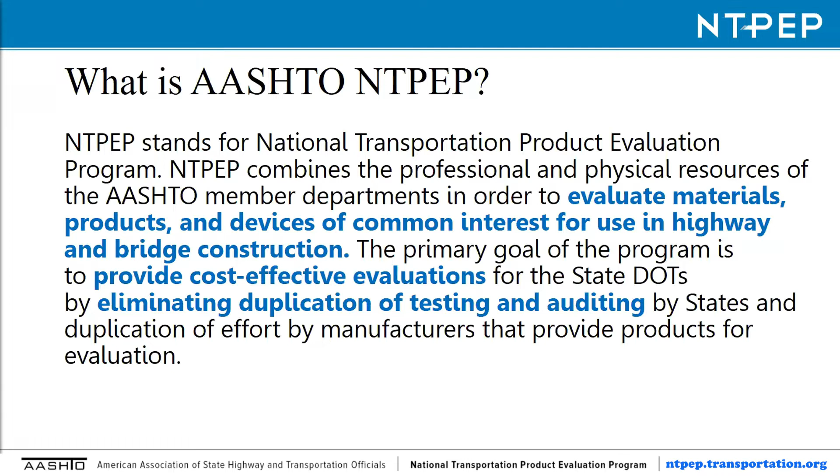For those who may not be familiar with AASHTO's third largest technical service program, NTPEP stands for the National Transportation Product Evaluation Program. The purpose of this program is to combine both the professional and physical resources of each of the state departments of transportation to evaluate materials, products, and devices used on both roadway and bridge construction. The primary goal of this program is to provide cost-effective evaluations for the DOTs by eliminating duplication of testing and auditing services by the states, and it also removes the duplication for manufacturers to provide these products and data to the state DOTs.

Some of the benefits of this program: NTPEP pools resources to save the states and manufacturers both money and time. The data from the product evaluations and audits are available on our NTPEP DataMine website. The NTPEP members contribute to the work plans that are utilized to carry out these product evaluations and audit programs. The NTPEP technical committees provide a platform for both states and manufacturers to share their expertise and voice any concerns they may have. By this unique partnership, we are able to sustain a high level of quality for these products being evaluated within this program.

What is the NTPEP DataMine website? It's commonly referred to as NTPEP DataMine 3.0. It is the online repository of all the data and all the audit documentation that gets put out as a result of the evaluations and audits taking place. This database provides the tools for you to perform queries that will assist you in analyzing and reporting on current and past NTPEP evaluations. It also allows the test facilities and auditors to enter real-time data. So as the testing gets completed, as the audits get completed, this information is available to all of those registered users in DataMine. If you do not have a DataMine account, I highly encourage you to check out the NTPEP DataMine website.

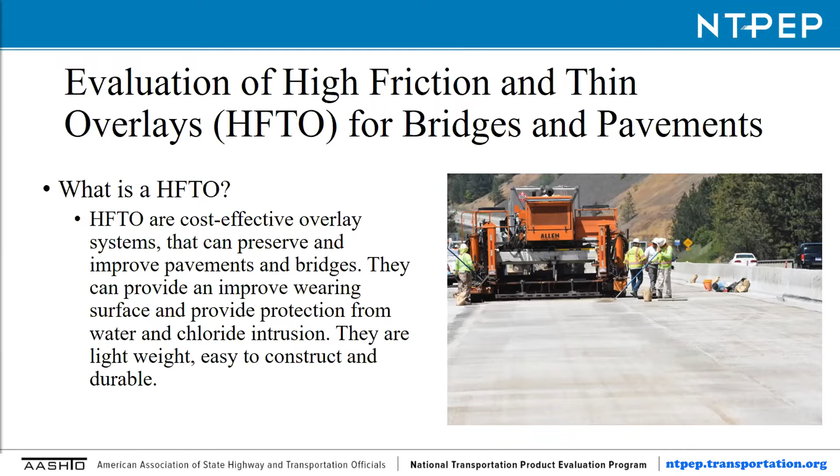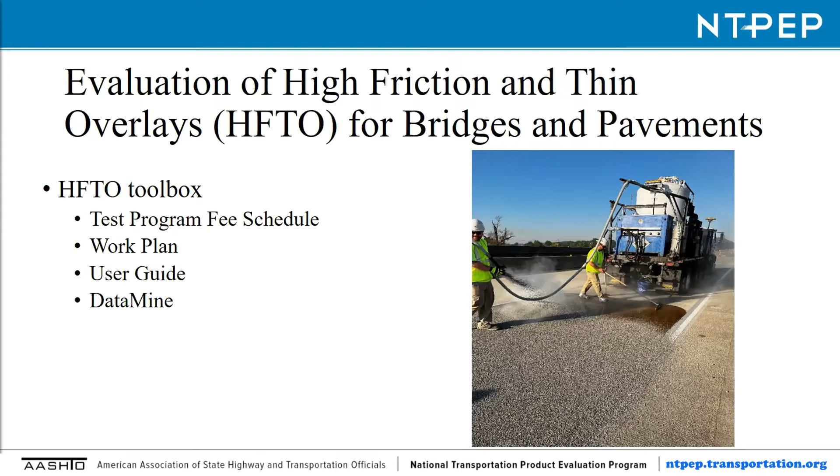The high friction thin overlay technical program contains 4 basic components. The first is the application and testing fee schedule that manufacturers consult and apply in order to participate in the program. Next is the work plan that provides the structure of the program and outlines exactly what the testing and evaluation program entails. Next is the user guide, which serves as an implementation tool for agencies to utilize to determine how they can best use the program. Finally, Data Mine is the repository for all the data and the reports generated by the High Friction Thin Overlay program.

The fee schedule for all of the technical and audit programs are found on the NTPEP website. The general description gives an overview of what will be included and the product evaluation or audit fee. This program is comprehensive in that it provides for both lab testing of the individual components of the overlay system, as well as the field evaluation of the constructed overlays onto multiple substrates, including asphalt, concrete, and a concrete bridge deck.

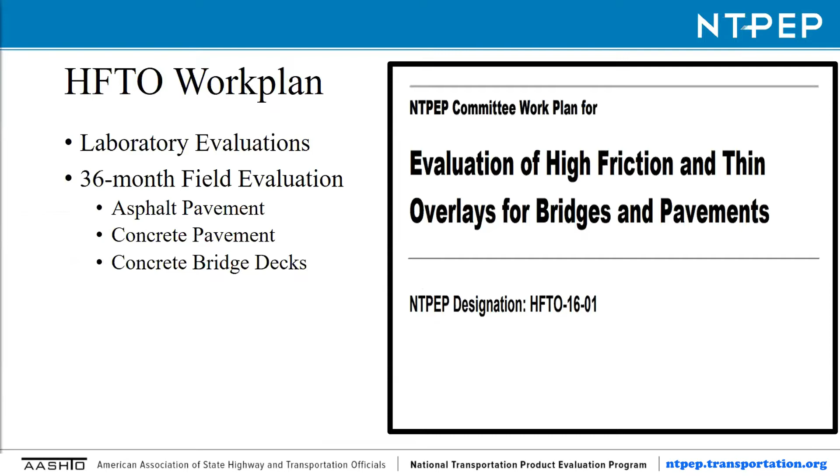The work plan is a summary of the specifications, processes, sampling, and inspection procedures that will be followed during the evaluation of the high friction thin overlays. This work plan will be followed for each material submitted to the technical committee. The work plan standardizes the evaluation and allows for consistency, reproducibility, and transparency. When states utilize the NTPEP programs, it streamlines and improves the overall quality of the high friction thin overlays constructed in all of our states.

The laboratory evaluations are included, as well as the 36-month field evaluation. Sampling is also outlined in the work plan.

The integrity of these samples is critical to the program's success. Representative samples of the polymeric binder resins, both Part A and Part B, are sampled separately from the material that arrives at the field test site locations. A representative sample of the aggregate is also collected.

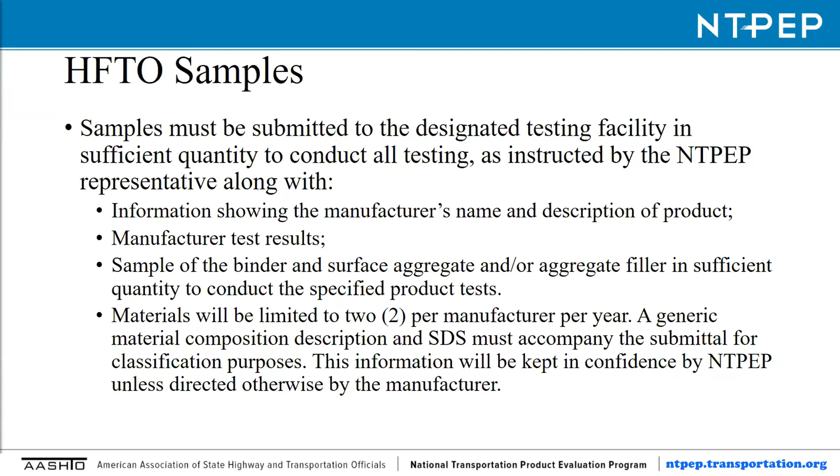These samples are labeled and secured by NTPEP staff and delivered to the High Friction Thin Overlay Test Program contracted laboratory for the testing. Samples must be submitted to the designated facility in sufficient quantity to conduct all of the testing, as instructed by the NTPEP representative, along with information showing the manufacturer's name and description of the product, the manufacturer test results, a sample of the binder and surface aggregate and/or aggregate filler in sufficient quantity to conduct the specified product test, and the materials will be limited to 2 per manufacturer per year.

A generic material composition description and SDS must accompany the submittal for classification purposes. There are several different binder systems used in this program, and we want to be clear on which system we are testing. This information will be kept in confidence by NTPEP unless directed otherwise by the manufacturer.

Future Labs, LLC is the High Friction Thin Overlay contracted laboratory. They have done an excellent job with this program, and were generous enough to provide the photos that I will use to describe the lab testing aspects to follow in these slides.

They perform both the polymeric resin binder testing as well as the aggregate testing. The binders are tested as individual components as well as mixed. The properties tested on the binders include viscosity, gel time, tensile strength, tensile elongation, tensile modulus, absorption, Shore D hardness, compressive strength, and an infrared spectrum is collected. The properties of the aggregate tested are gradation, absorption, Micro-Deval, and the XRF spectrum is also collected on the aggregates.

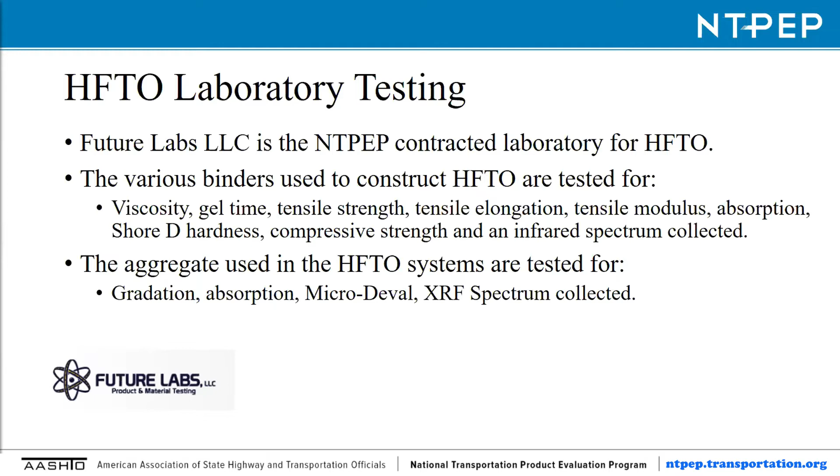The testing performed is done in accordance with standard methods of both ASTM and/or AASHTO. Details regarding the mixing and curing are provided by the manufacturer. I'm now going to dive into the details of each method in the next few slides.

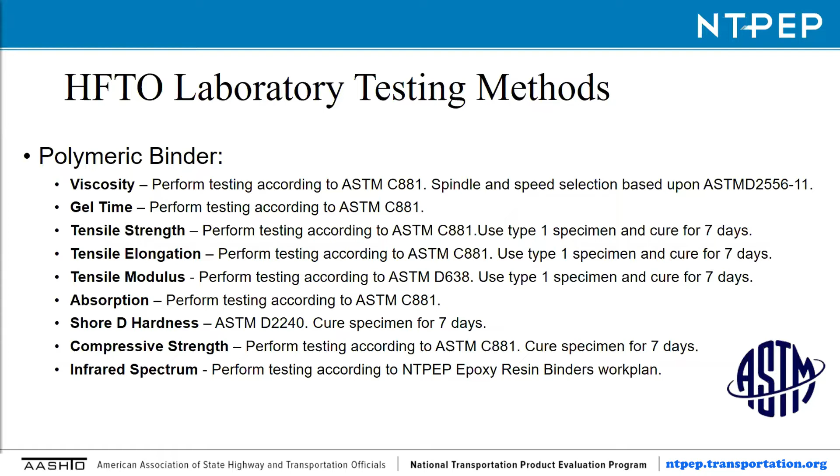After the components of the binder are mixed in accordance with the manufacturer's recommendation, viscosity is performed in accordance with ASTM C881. The spindle and speed selection are based on ASTM D2556, the year number 11, because of the spindle selection chart in the appendices.

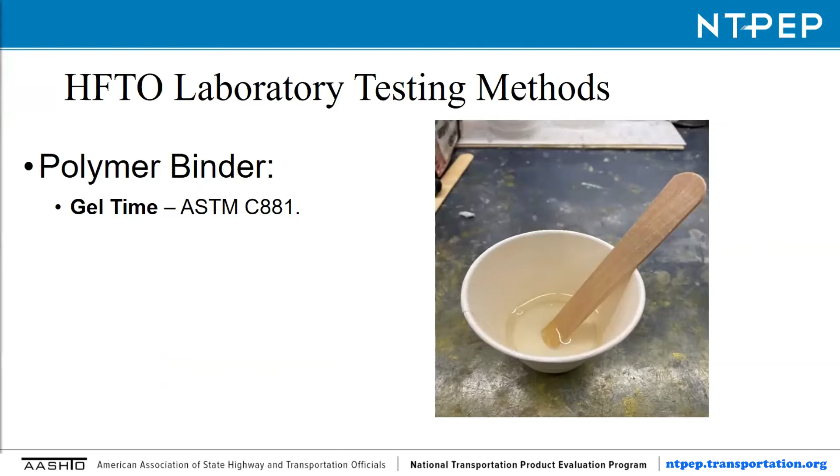The gel time is evaluated on mixed binder material in accordance with ASTM C881. The components are mixed together and placed in a cup, and the gel time is then tested. Tensile and elongation properties of the mixed and cured polymeric binders are tested in accordance with ASTM C881.

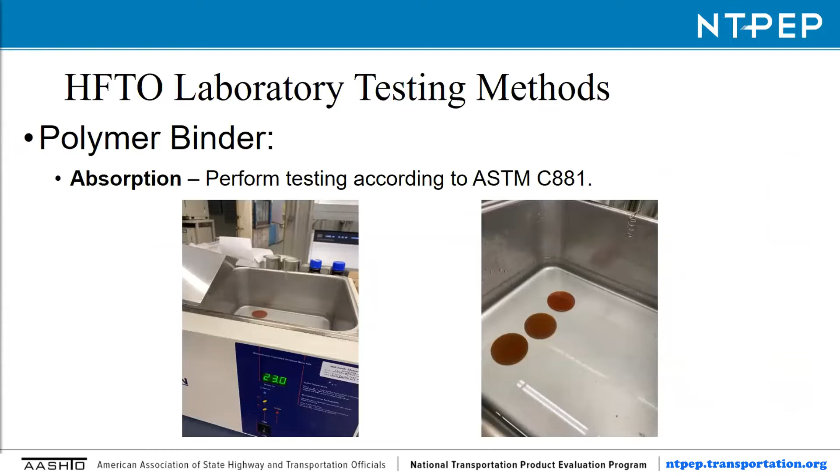Absorption will be evaluated on the mixed and cured binders in accordance with ASTM C881. These photographs depict the testing as done in the Future Labs laboratories.

The Shore D hardness testing will be done in accordance with ASTM D2240. These are a couple pictures showing the testing in progress.

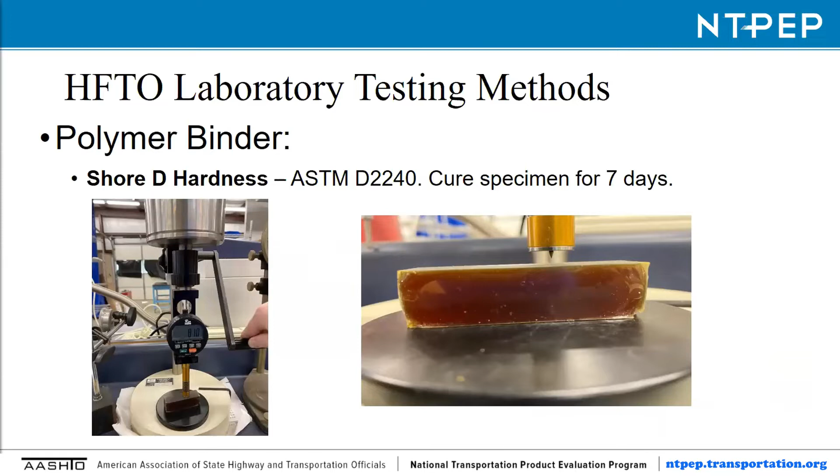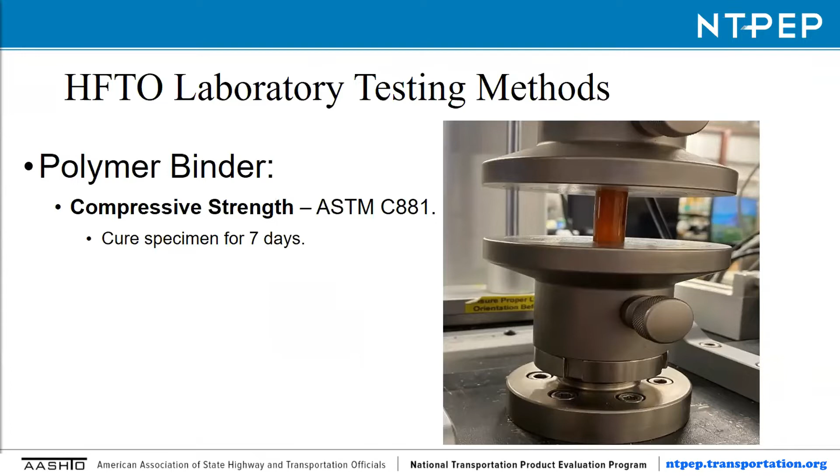An infrared spectrum is collected on all the binders. The spectrum is collected in a standardized manner that allows agencies the opportunity to use those spectra in both a physical paper format or electronic format to evaluate the materials supplied to their state with those submitted to NTPEP. This is a way states can perform quality assurance testing and utilize the high friction thin overlay program to verify that data.

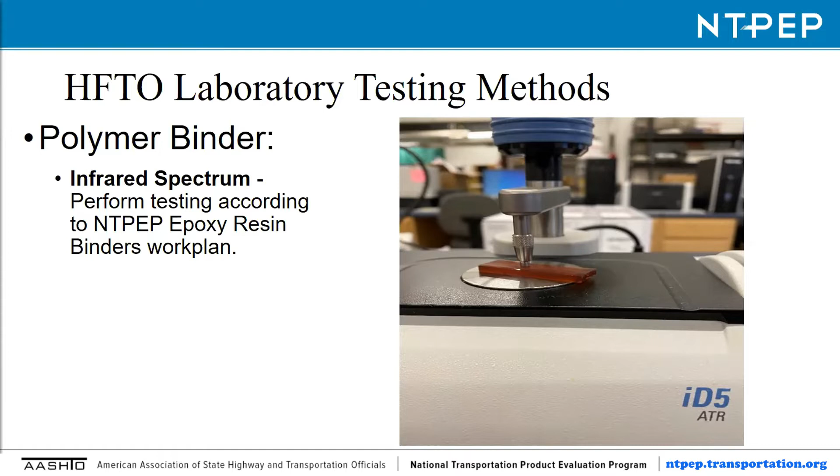The aggregate portion of the high friction thin overlay systems are evaluated by the contracted laboratory as well. Future Labs also does the aggregate testing. Aggregate is tested for gradation, absorption, Micro-Deval, and X-ray spectrum.

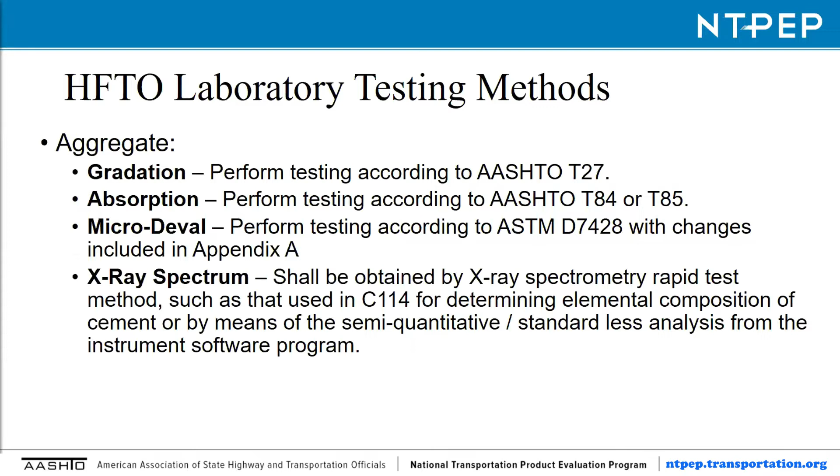As mentioned previously, representative samples are collected from the field evaluation test site. Those samples are processed by the lab for each of the tests performed. Most states have their own criteria for the aggregate, and the high friction thin overlay aggregate evaluation data may be used to verify compliance with your own state specifications.

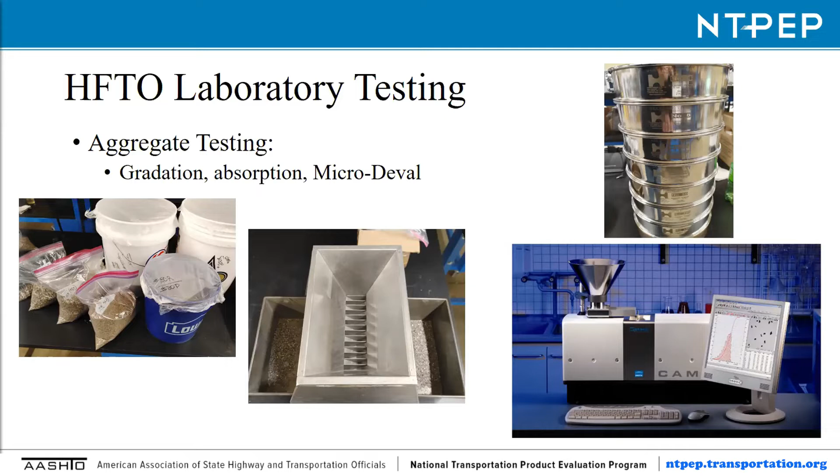Micro-Deval testing is performed in accordance with ASTM D7428 with modifications. Those modifications can be found in Appendix A.

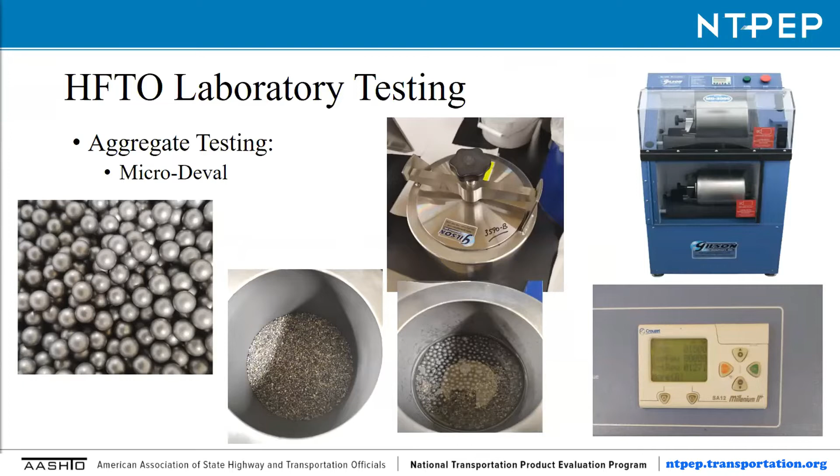X-ray fluorescence, XRF, is analyzed to determine the elemental analysis of the aggregate. Again, this data may be compared to state specifications for compliance with chemical requirements within your specifications.

It is now my pleasure to hand off the presentation to Danny Lane with Tennessee DOT. He is the esteemed chair of the High Friction Thin Overlay Committee, and he's going to discuss the field evaluations, data mined, and the new reports being prepared for the high friction thin overlay products evaluated. Danny?

Thank you, Kelly. Can everyone see that? Am I showing what it's supposed to be showing? Absolutely, yes sir. Okay, great. Well, thanks, and we have a nice crowd here today, 70-something people. It looks really good. But let me get started.

Kelly went over what we do in the laboratory and what Future Labs has done for us. Later on, she'll share some other things they've done a really good job, and we're glad to have them aboard. Well, my name is Danny Lane.

As you well know, I work for Tennessee DOT. I did a lot of these demos and stuff like this long before we had the HFTO field evaluations. I got to be part of that in 2012, 13, and 14 in Kentucky, 2016 and 17 in Tennessee, and now in Missouri.

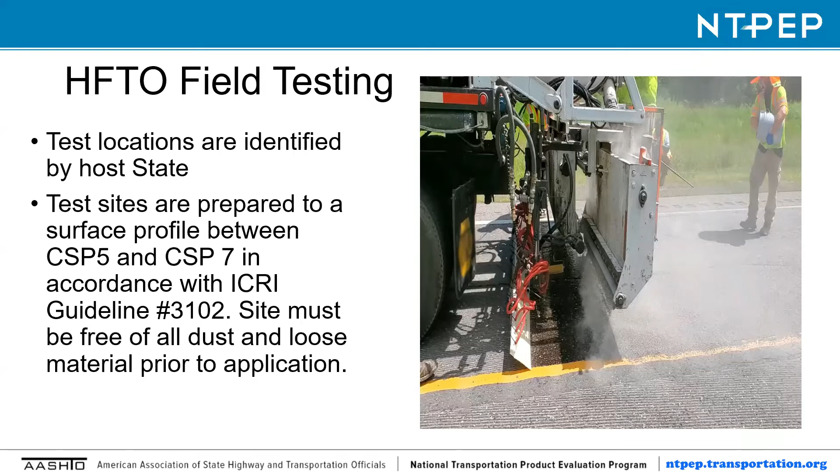The Missouri DOT and NTPEP got a company out there to shot blast these areas to have them ready to go when we do apply to the concrete. The asphalt, of course, is all just air washed like we do every day in a regular contract.

Our host was Missouri DOT, and Todd Bennett and his folks there stepped up this year, and they picked a heck of a place.

Myself and Richard Weber from our department went out and visited and looked at these site locations, and we really got excited. I think it's going to be a really good test for these products.

The 2 days of installation were September 28th and 29th. As you know, some of these test decks we did in June and July, and buddy, it is hot. It was still hot even in September, but starting temperatures were in the 60s and ending in the 90s, so our deck temperatures did get over 100 in some areas.

Each site has an NTPEP representative. Originally in Kentucky, I came up with some field notes, but I was stuck on the bridge for 3 days that weekend, so everybody that came to the bridge, I had to look at their products and go take notes myself. We changed that in Tennessee - we put an engineer or technician with each supplier, and they followed that supplier around to every deck so they could take notes and record start and finish times, cure times, and things like that. We document all that, and I'll show you that later too.

Manufacturers participating were Cornerstone, Epoplex, and Mineral Research. Now, Mineral Research is an aggregate that they use. They did use a binder from EChem to put this in, so that's going to be recorded too.

SharpGuard is an aggregate that we're looking to prove. As you know, if you've looked at other test decks in Tennessee, we had 5 different aggregates, and I'll let you know that 2 of those came out ahead, and TDOT is using them now. So we're excited about that. We like the fact that not only binder systems, but aggregates get to participate in this too.

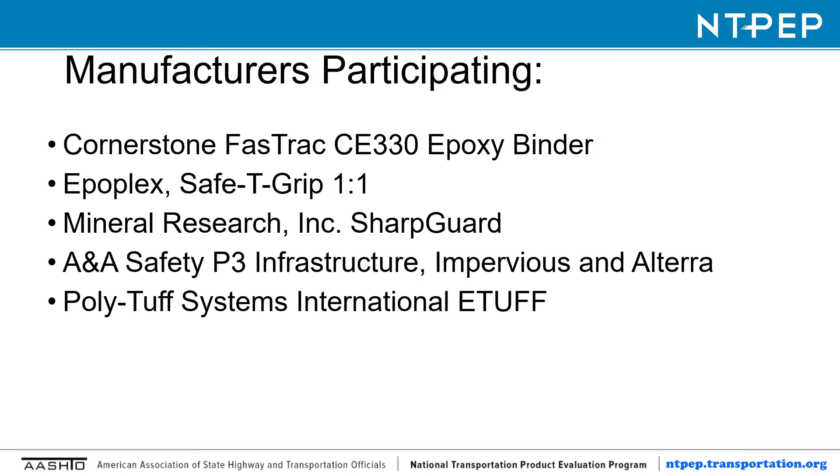A&A Safety was the contractor for P3 Infrastructure, which had 2 products, Impervious ME and Alterra, and then Poly-Tuff Systems International ETUFF. So we had good manufacturers participating in this program - not quite as many as we had in Tennessee, but still a large crowd.

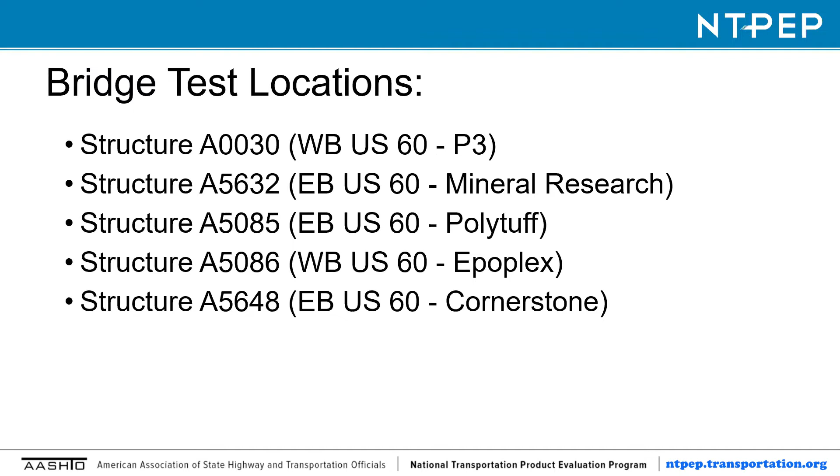We used bridge deck test locations, and it's really funny - Kelly came up with this guide, these test deck locations on a Google map. You can actually, from our report, go to the GPS, and you know Missouri is a flyover state, so they get Google Earth brand new every year. We'll have pictures every year and everything, but you still use the GPS to go look at these, which I have done several years after, even in Kentucky. So remember that - we'll have all those locations listed.

Representatives on site were Catherine, of course, Todd Bennett, and Seth Bollinger from Missouri. They did a heck of a job. Seth pretty much did the deck prep and all the traffic control, and did a great job for us, because we do have people out here on this test deck and they need to be protected.

Leonard Vader was a technician, a chemist with Todd - he was one of the representatives. Madeline Whalen, myself, Richard Weber, and Kelly Morse each had a supplier that we stuck with both days, and so we followed them. We knew every move they made, and we could document everything that goes on.

Also some more friends, Justin Morris and Khalid from Louisiana, showed up and gave us a hand. They got to see some firsthand experience of how this test deck goes down and what happens in that 200-foot section that needs to be done, and done perfectly.

You'll be surprised when you look at these reports that they're all done a little differently. Not everybody does it with a mechanical mixer. Some are the same, some are not, but you'll get to see what goes on, and they all come out pretty good.

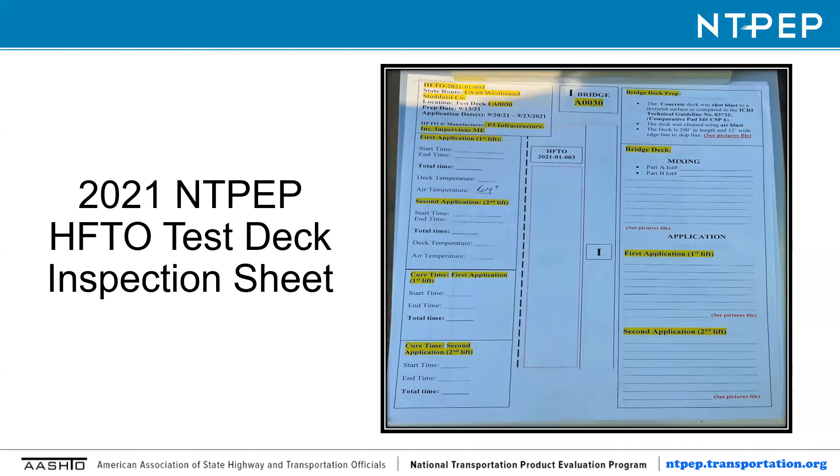We come up with this to get everything in order. So when that person is following that supplier around, they get to take notes on everything they do for that particular test deck. We photograph the worksheet to designate location, so every photograph that comes after that is for that test deck. This helps our inspectors and reps keep up with everything they've got, and we put it in later when we compile a file.

We verify the structure number and location. We document the time and start of the first and second application — of course, the second application is only for bridges. We do try to record the deck temperatures and air temperatures for both, to give you an idea of when and how this stuff was put in.

We try to track the cure times. We know these products, these binders, cure within an hour or two after placement. Sometimes the contractor would leave, go to another test deck, come back and later sweep off — that doesn't mean it took that long to cure. Most of these have traffic turned on them within two hours, sometimes sooner. I don't recommend it, but some of them are faster than that.

We document the material mixing details — part A, part B, lot numbers, and all that — for our future lab people, so we have all of our samples and know where they came from. The photographs taken demonstrate the process and steps taken to install the HFTO.

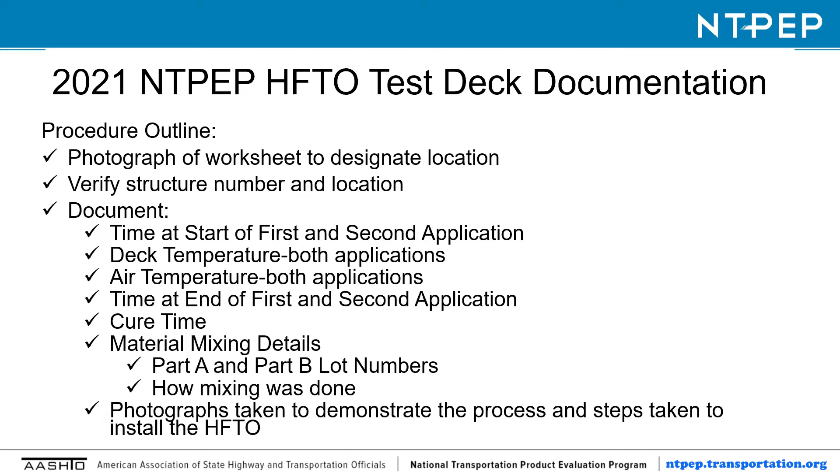Then in the report, we show the final twenty pictures for the initial application and every year after that.

In the 2021 HFTO test deck photographs, the concrete deck was shot blasted, and everything was air blasted. Some of the suppliers did this on their own too, just to get loose impediments or anything off the deck that they felt needed removing.

The deck was 200 feet long, 12 feet wide, edge line to skip line. As you'll notice, some of them use duct tape or something similar to protect the line — we do this practice even in Tennessee. But when we're doing a bridge deck, we go wall to wall because we want to protect the complete deck of that bridge, and again, we use it extensively in the state of Tennessee.

The trucks and materials mostly come with assisted mechanical mixers — in other words, they have a part A, part B tank along with the aggregate. They come through a static mixer and it mixes right there. We found out, even in the materials testing laboratory, that this is the best way to mix the A and B, even in the lab. We learned a lot of good things working with the future labs and those guys this year, and they really liked the idea. That's exactly how it's done in the field.

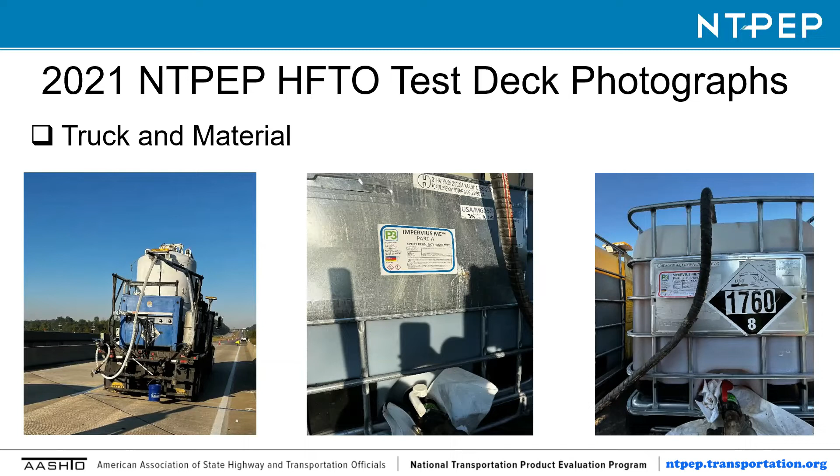We're going to show you all the applications for these and how they're done in a picture sequence for each test deck, so you'll see how the process works. If you notice these three pictures here, the mechanical mixer is dropping the binder, the guy is squeegeeing it, and the guy with the aggregate is coming in behind it, placing the aggregate on top of the binder.

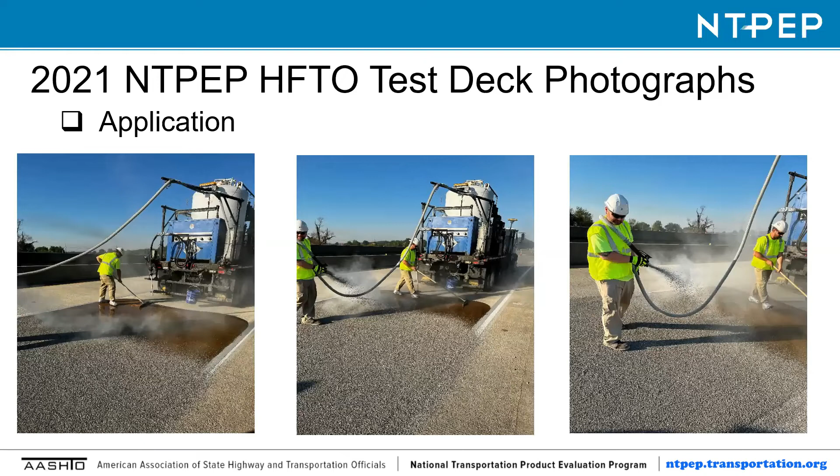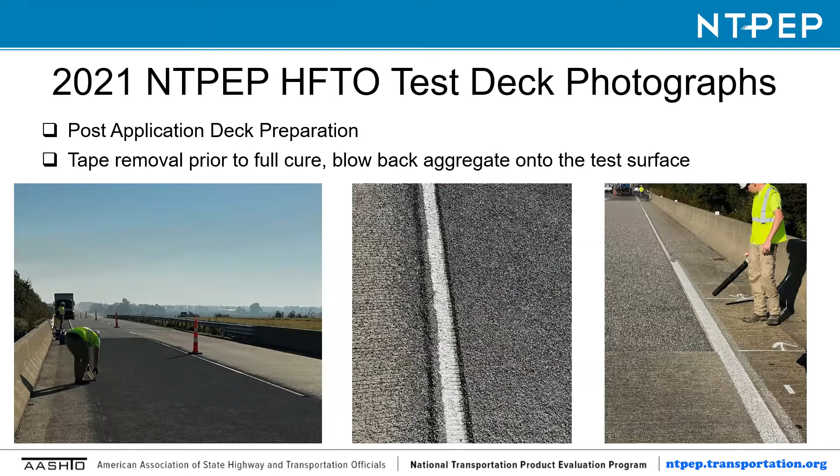Post-application deck preparation: of course, they pull the tape up before it sticks too bad — you do not want to let that happen. After the tape's removed, they blow the aggregate on top, then come through with a sweeper or broom of some type to remove the excess aggregate. On bridge decks, before the second application, they usually do an air wash, then go right back on top — they put the tape back out and start their second application.

As a rule of thumb, everyone needs to know it takes almost double the binder to do a second application for a bridge deck, because of the surface area — it nearly doubles the binder quantity for that second application. In the state of Tennessee, anything on concrete gets a double layer from us, because we do not want to have to go back out there on that concrete.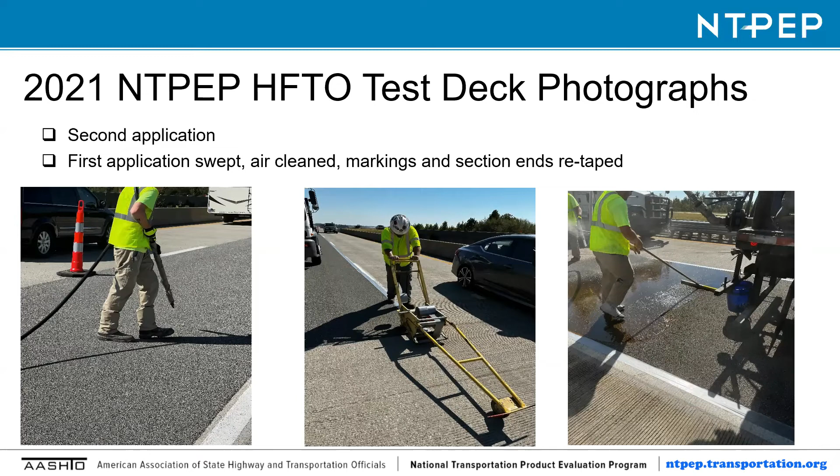We understand that asphalt has a lifespan and will be ground up later and used as RAP, and the binder or material used on asphalt does not do anything to your RAP. Repeat, it does not do anything to your RAP — you would never even know it's there. It still acts like maybe a sand or a small aggregate.

And then we do the post second application. The tape is removed again, and then we give you final pictures.

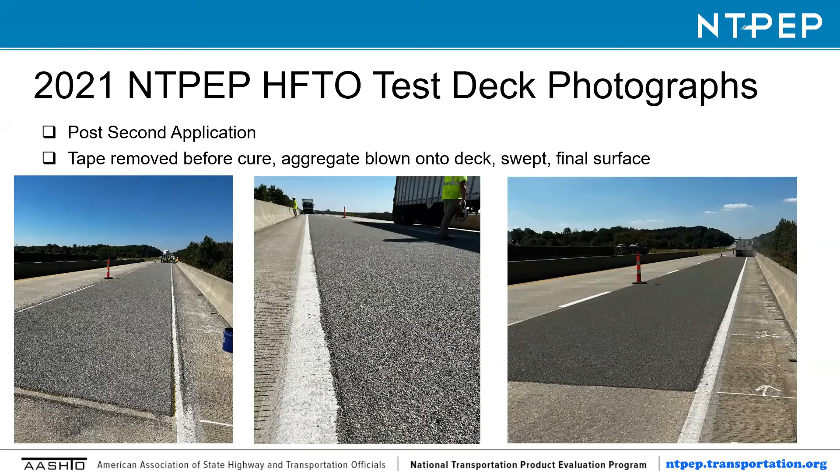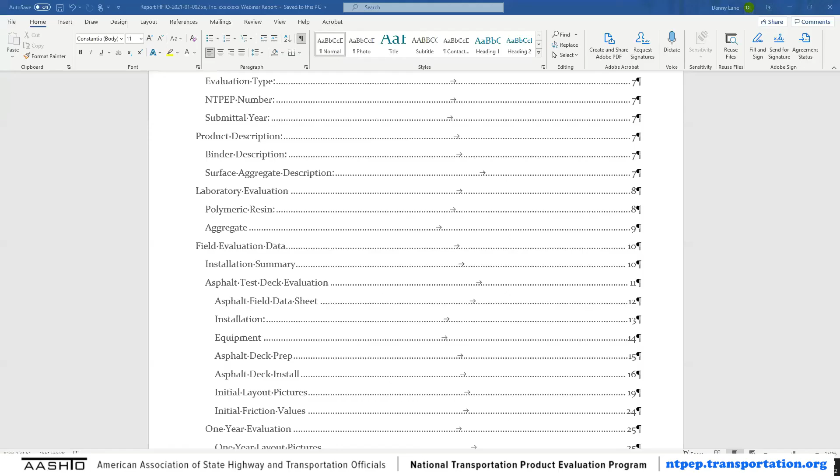I'm going to share a report with you now. Let me pull this up. Okay, give me a thumbs up. Can everybody see the report I have in front of me now? Yes. Okay, great. I did remove the names.

All of the reports have been completed. They will be assigned to their suppliers and manufacturers for their review. So I just took the names off of this.

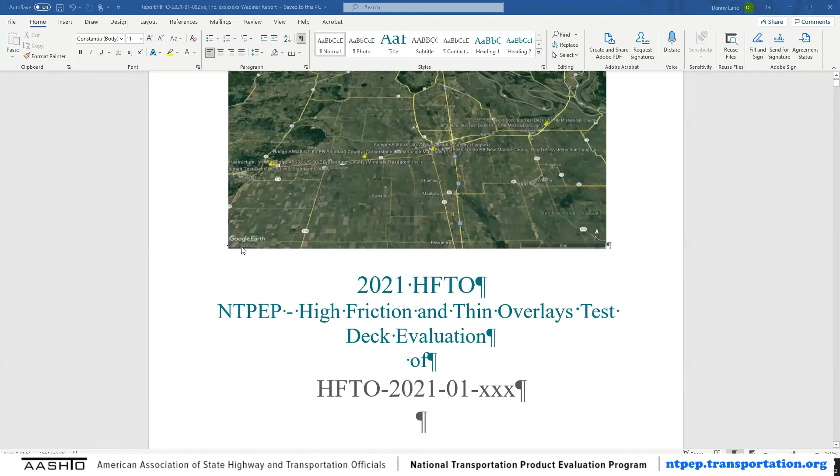It was really funny when we got through with all of these, all of our representatives putting in their notes and putting them in a Dropbox. Kelly sent her report in this form right here, and it automatically clicked with me. From the old DataMine, you used to put in products, for the binder, all the data for the binder, and then the aggregate, and then I would show a different PDF for the pictures and the install. Well, it clicked with me.

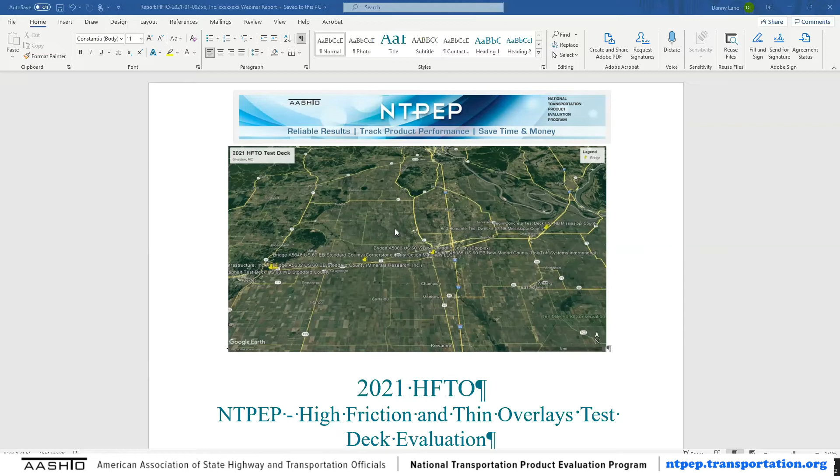Let's take everything, put it on Excel spreadsheets and Word, and then drop it into a PDF. So when the states go to look at a product, HFTO 2021-01, whatever, they get to see everything that goes with that one product in one document. So that's what we decided to do.

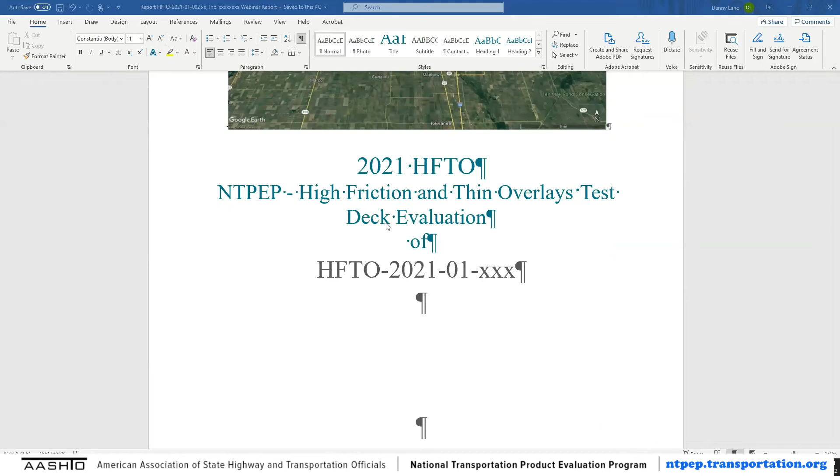I had help from Richard Weber with the spreadsheets and Kelly Morris, and then I put together this report. So let's kind of go through it.

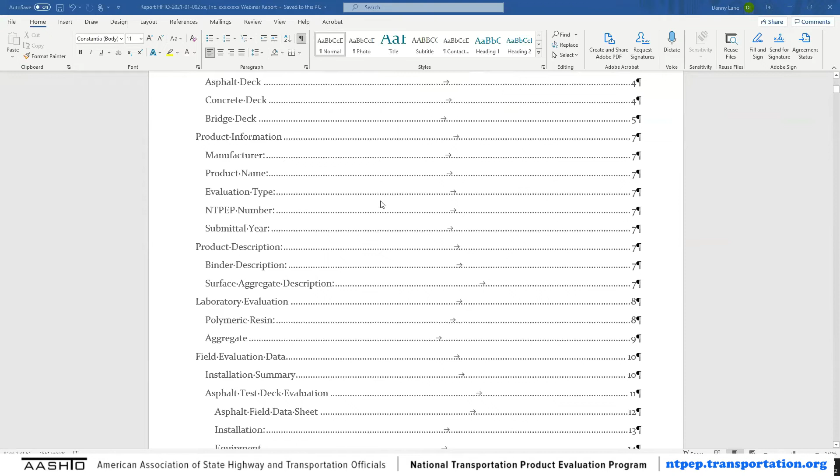In the table of contents report in the Word document, you will be able to click and go to anywhere you want to go in this report, but it's really just a follow through and a place holder for areas inside the report. We give a summary of the program and what it's all about, what you just learned earlier in this webinar.

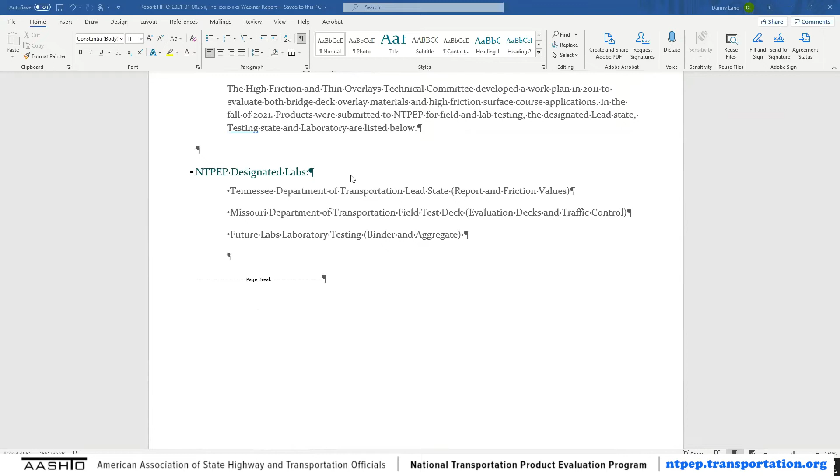We have the NTPEP designated labs: Tennessee Department of Transportation, Missouri, our friends from MoDOT, and Future Labs down there in Mississippi. Very good lab. Test deck locations, again, even on these sheets we'll show you in a minute, I have the GPS coordinates.

But we show you exactly where all this was and the friction values that go with them. Tennessee DOT performed the wet wheel 40-mile-an-hour skid program.

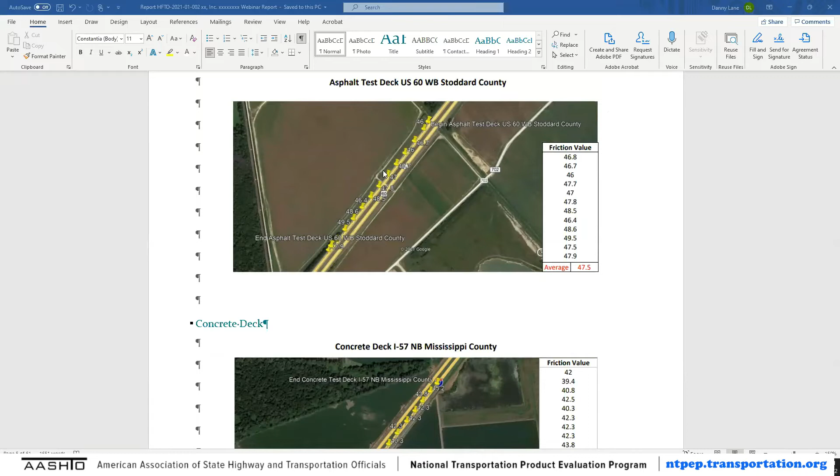Missouri does not even have that program, so we crossed that state line and went over there to help our friends out. And we really enjoyed it. Our skid guy did a heck of a job with this.

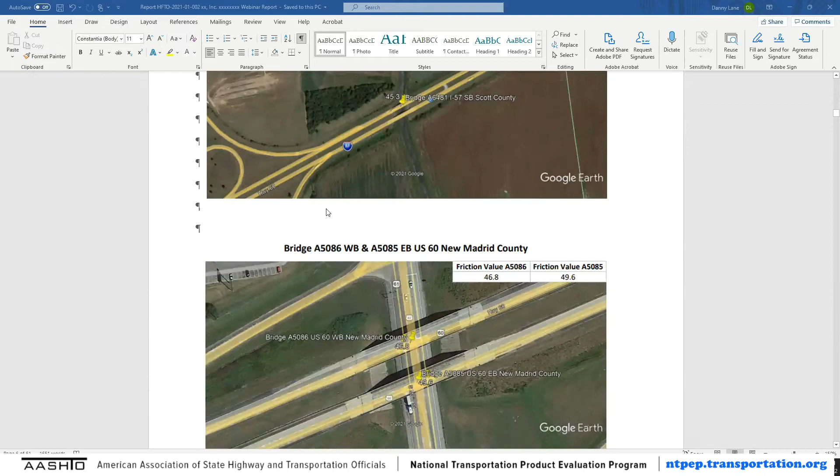So we got averages on all the asphalt and the concrete deck, and each bridge deck got a controlled friction value before we put anything on these substrates.

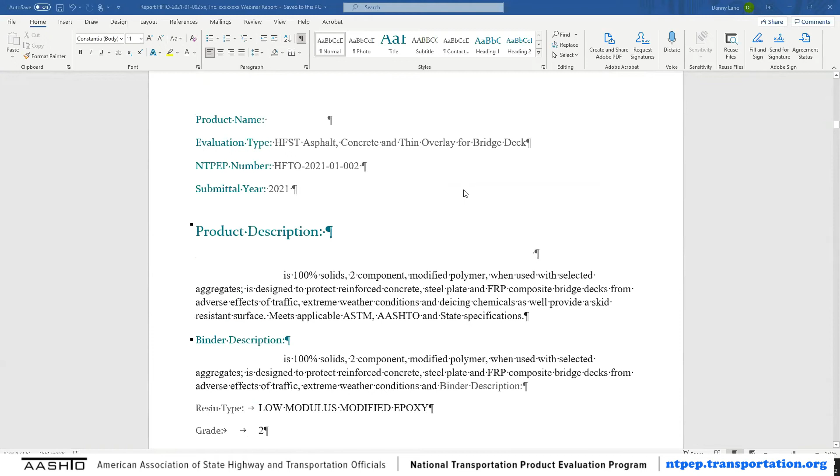Like I said again, I took out the manufacturer's name and the product, but I do go through it, and it does have a product description, a binder description, the grade, the class, and things like that. So most of you people in the laboratory, if you like epoxies you work with, you know the kind you want, all of that stuff's in there.

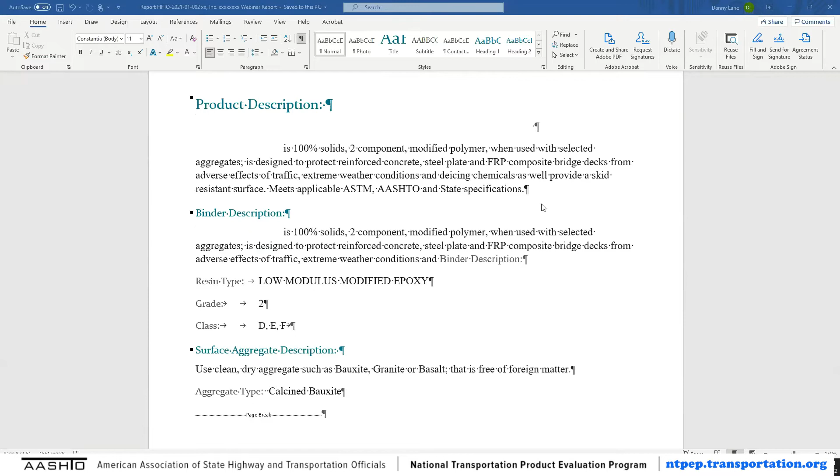We describe the surface aggregate description. In this case, it was a bauxite, granite, or basalt. In this case, it was a calcined bauxite.

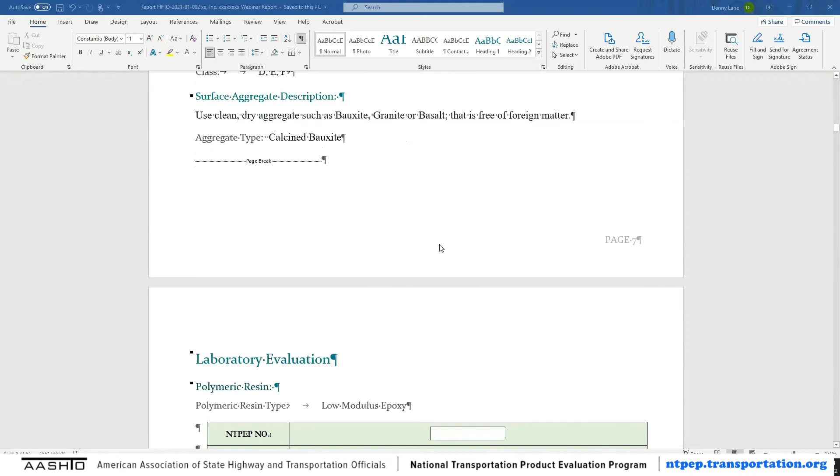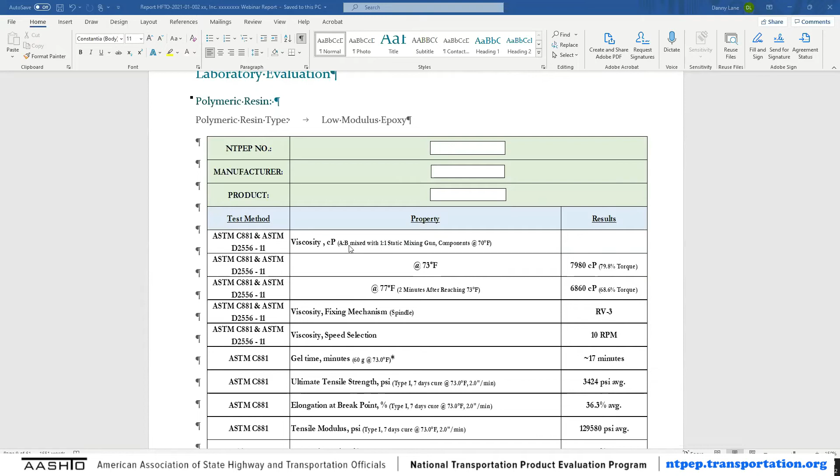And then we go to the laboratory evaluations from our friends at Future Labs. I took the names out just because we're holding this information to be reviewed by the manufacturers. All this will be released and you'll see everything. But you'll notice all of the laboratory evaluations coming through in one document.

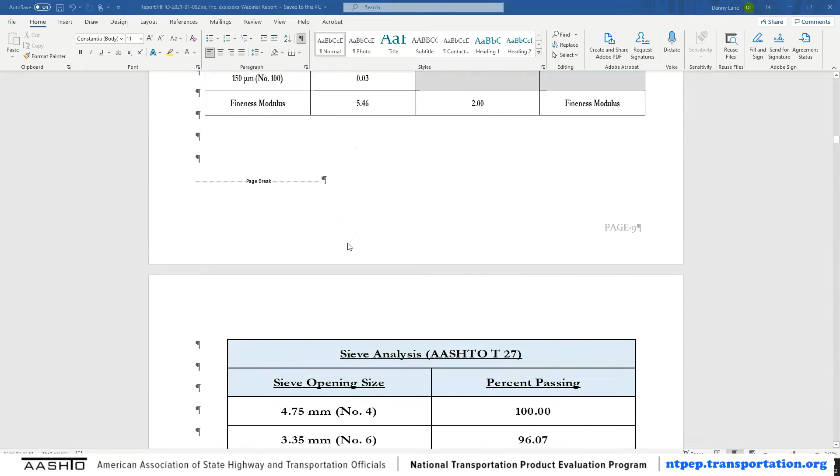Again, sieve analysis on all the aggregate. We actually do two sieve analyses, Micro-Deval, moisture content, and aluminum oxide content, which is really big for our calcined bauxite. A lot of these have requirements inside some of these other standards, and you may have some in your own state standards.

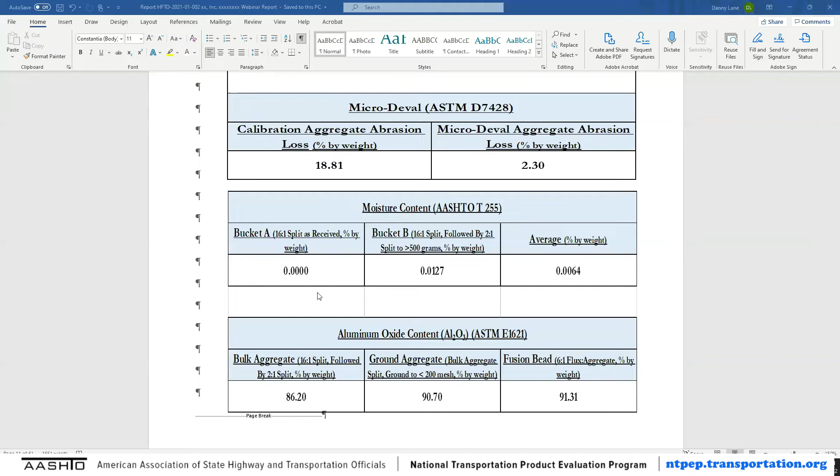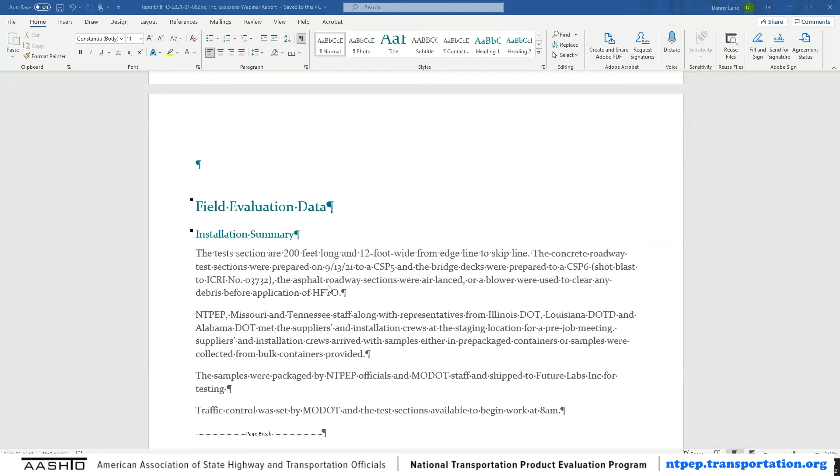So now we get to the field evaluation. We describe the installations, a 200-foot long, 12-foot wide test deck, how it was prepped, and who we worked with to do this. And then we come up to the first section of the asphalt test deck.

Richard Weber of our group created a spreadsheet where we put all our notes from the paper used out in the field. Each engineer, chemist, or technician with each manufacturer put his or her notes in here, and we got all the data from out there in the field - cure time, total time it took, and most of the time that 200 foot didn't take but like 30 minutes to put in, mechanically assisted and or hand applied and hand mixed in some cases.

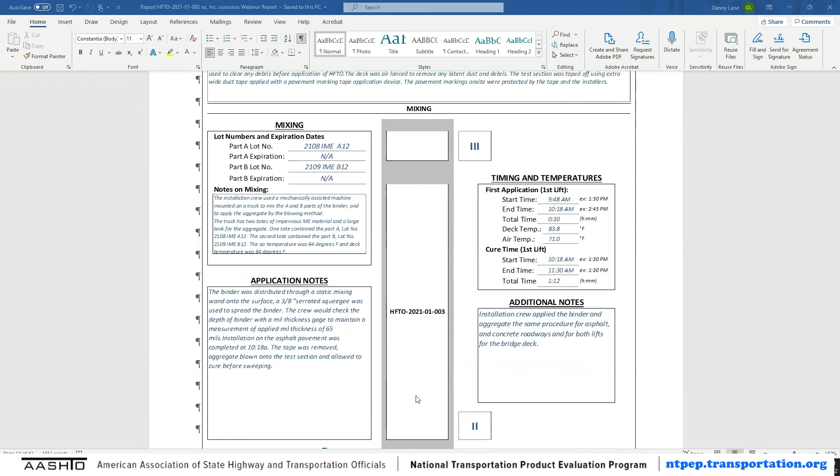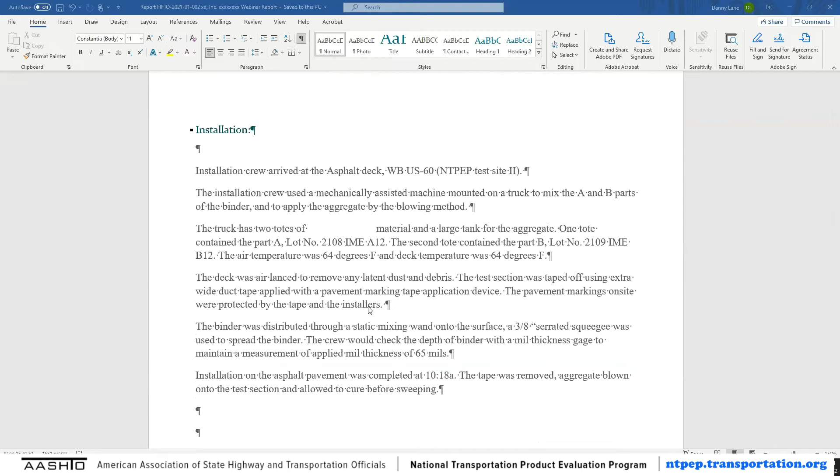We mark the sections, every one of them with a number, and get all that straightened out. Then we talk about the installation, how the crew pulls up and uses the A and B parts, what they used, and the lot numbers and that type of thing. All this came from the notes made in the field.

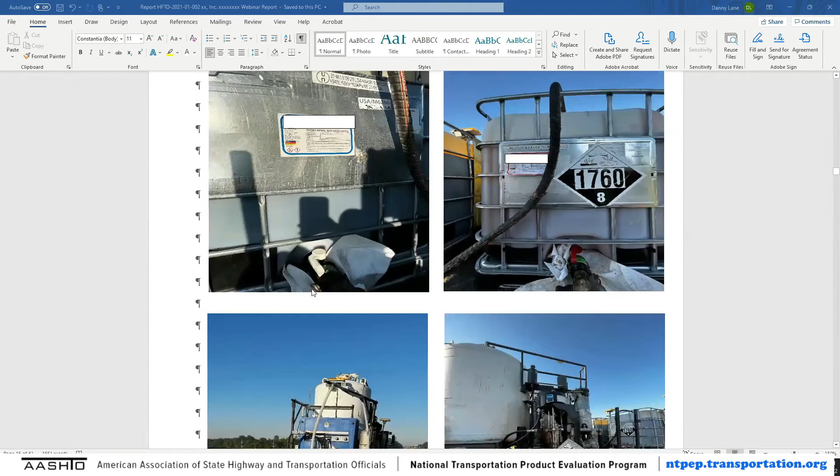Then we actually start showing the equipment, how the truck is mounted, the A and B parts, and things like that. Then we start with the asphalt deck prep, and we do this for concrete and bridge deck as well.

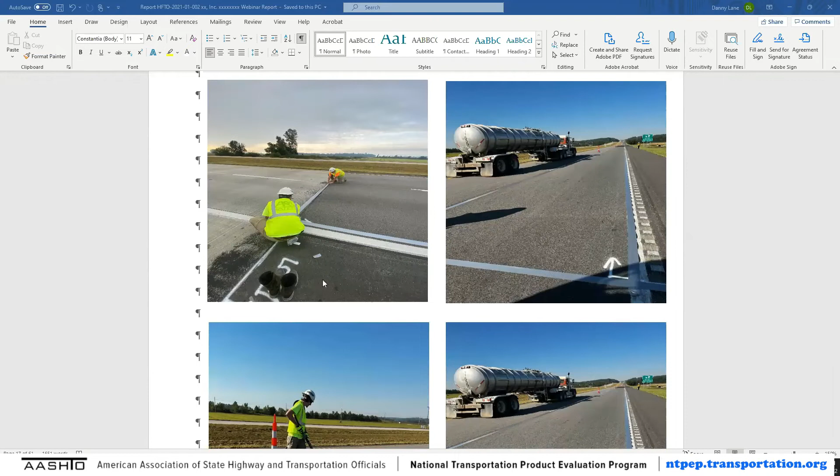These guys are taping off the areas they want, saving that line where they're going to put this down. He's going through with an air wash, and as you see, traffic's going by us. There are several lines of this asphalt test decks - asphalt and concrete back to back, back to back, with about 100 foot in between, so everything was pretty much on an even level.

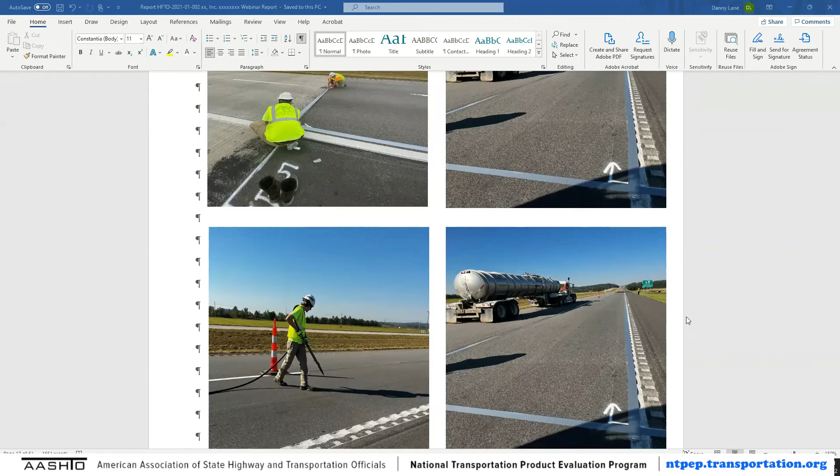We were really proud of the test deck locations that Missouri picked, and especially after the winter we had this year, it's going to turn out really well.

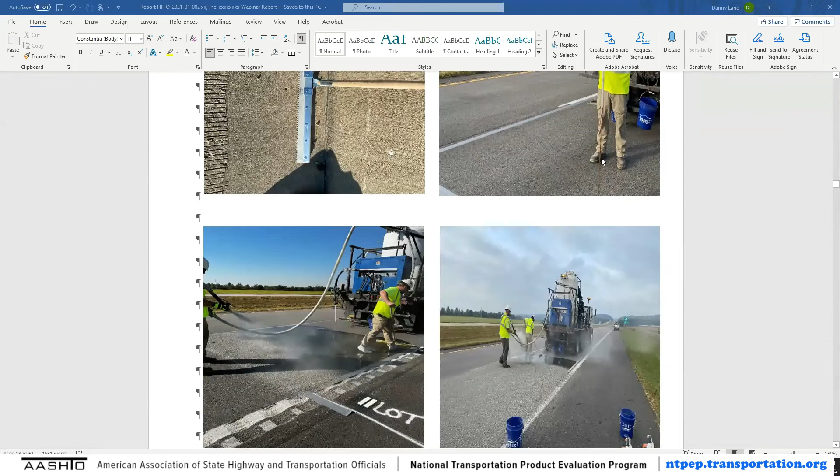We start talking about the install too, so you see how things work - you kind of get to walk through it. If you'll notice, he's dropping his binder out right here, coming through the static mixer. He's starting his squeegee process, and the guy comes along behind him with the aggregate, blowing the aggregate on.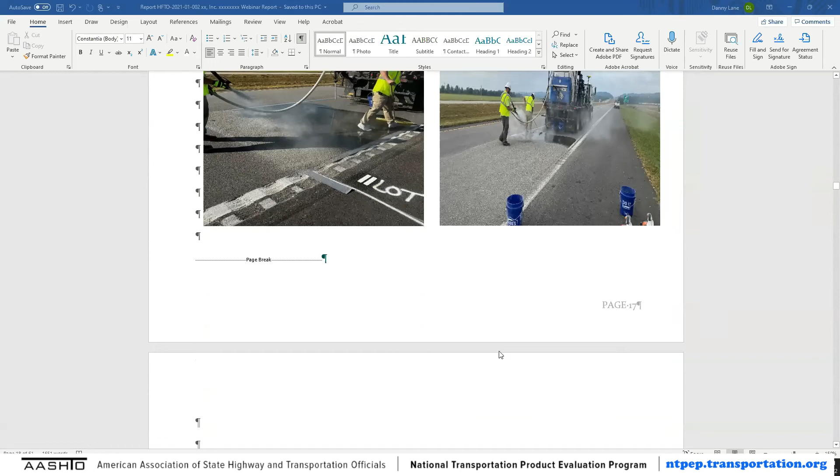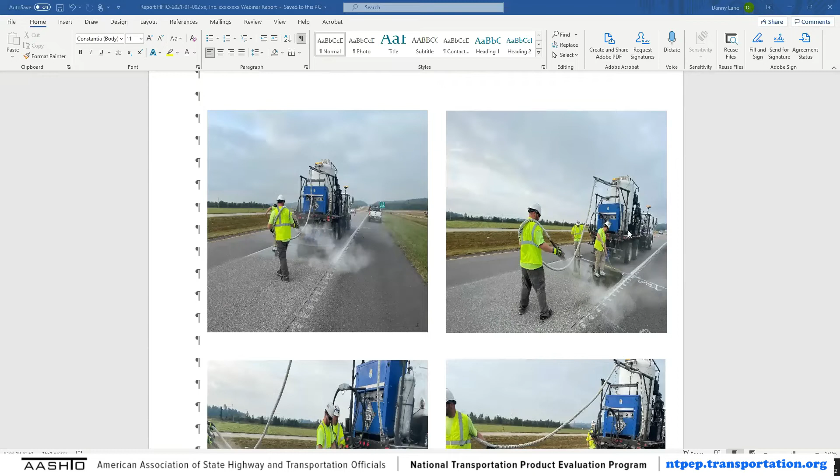This was a good operation. These guys really had it together on this, which most of them do, since they've done this before. As you know, they've got one guy squeegeeing and one guy blowing the aggregate, then just checking the equipment. When they get to the end, they stop, and then they start pulling tape and doing things.

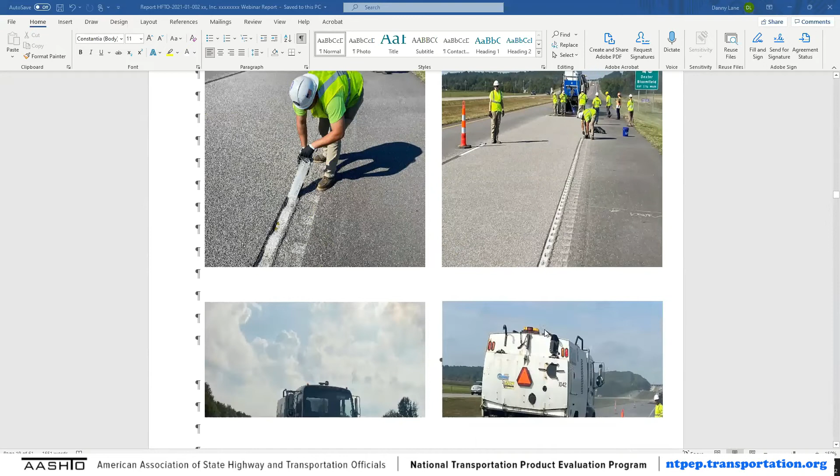If you'll notice how it keeps coming together, they blow the excess aggregate on, and then they come by and sweep or vacuum to remove the excess aggregate.

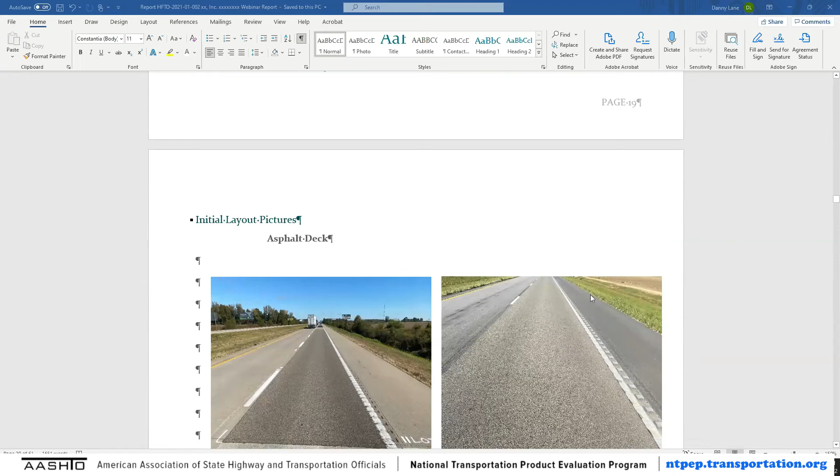So what we do is about a month later, actually a little less than a month later, we come out and do the initial layout pictures and the initial friction values for each one. What I try to do is get an overall look in the first picture of the total 200 foot, and then I go about every 3 to 4 steps and take a picture. If you'll notice, anytime you look, you can always zoom in and zoom out.

We do have videos that are going to go with these. We're having a little harder process to do the videos, but we will have them out. As you'll notice, there are about 20 pictures that go through here.

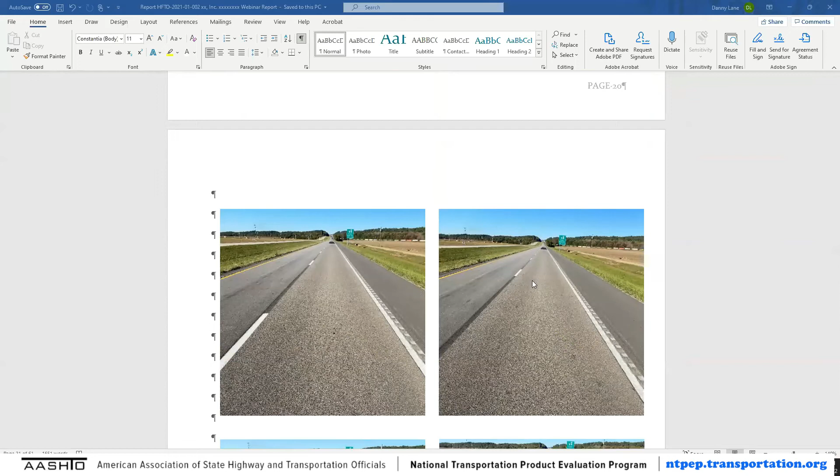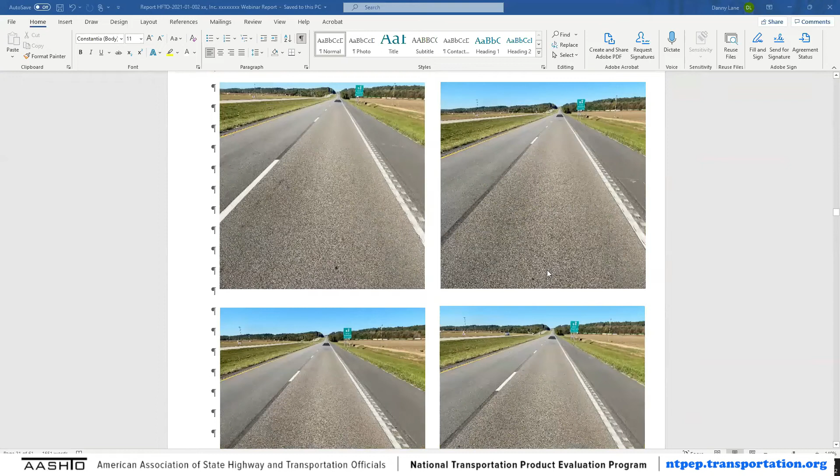Now, this is the initial - this is after it's been put in and everything's finished. The contractor is gone, so now we're looking for the 3-year evaluation in the field to see how this thing performs. I do take a lot of pictures, but it does let you go about every 10 to 12 foot to see exactly what's in that test deck on top.

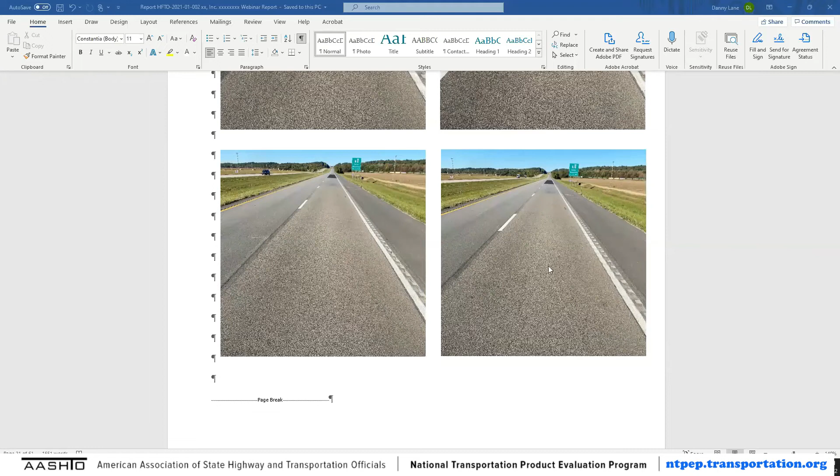These guys look really good. Not all of them look this good, but that doesn't mean they're not working or getting friction and stuff. It's just that some products are put in differently than others. So we take a look at each one of these, and they'll be able to do this.

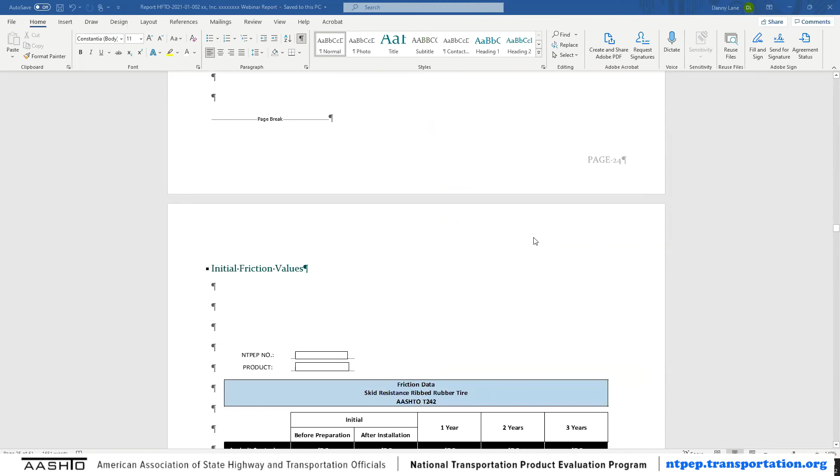Everything for those 3 test decks for this product, including the skid, is in one PDF, and I'm really excited about that. You could actually take the 2 PDFs and put them side by side to compare products.

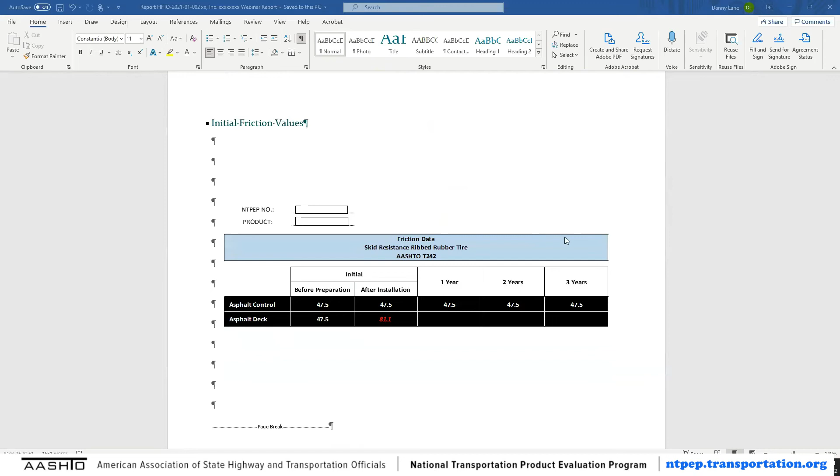As you'll notice, this asphalt control was a 47.5 with our initial, and this product right here took it to an 81.1. Again, we do that for everyone.

Now, the next year will be a 1-year evaluation. They'll get the same 1-year evaluation layouts and the same 1-year friction values. We'll do that for year 2 and 3, and it'll all be in one PDF.

Again, we dropped over here and we go straight down to concrete and stuff like that, so that we do the same thing for each deck.

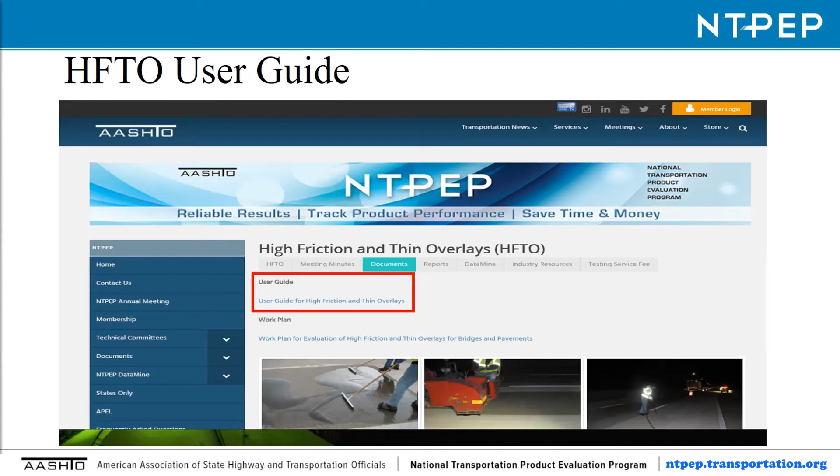The high friction thin overlay user guide can be found under the documents tab. If you go to the technical committees tab and then click on the user guide under documents, that hot link will take you to the user guide. Once you follow that link, you'll be directed to the high friction thin overlay user guide document.

The high friction thin overlay user guide contains an introduction to the high friction thin overlay program, just a basic overview, similar to what we've talked about today. It'll talk about general cured binder properties you should look for, the different binder types, some key aspects of the technical program. It'll give you an FTIR correlation procedure. I mentioned earlier in the lab testing that they run an ATR FTIR, how a state can then use that information provided as part of the program to verify compliance of the material in their states. And then it gives references from AASHTO for some specifications for material performance properties that states could use.

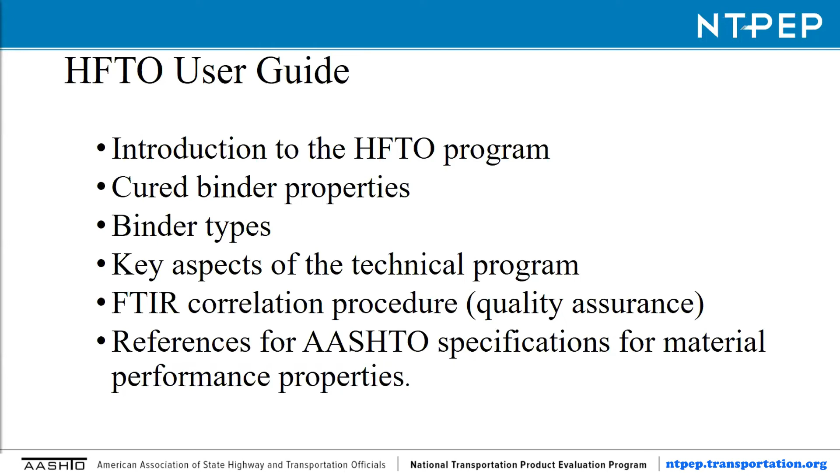The user guide, as well as contacting anybody in the technical committee, can help states develop and improve upon their own high friction thin overlay programs. I've personally learned many excellent strategies from my fellow NTPEP colleagues, and that helps me improve the materials and processes here in Illinois. As I mentioned, the NTPEP high friction thin overlay program is constantly evolving and improving, and we as the technical committee understand that we will need to adapt and change to keep relevant and provide the best quality data and information to our state users.

In that effort, we will be discussing the recent AASHTO Comp 4C harmonization efforts on the MP35 standard for thin overlays, and the MP41 standard for high friction surface treatments. The goal is to implement some of those potentially into our work plan. Specifically, the changes that were helpful are some of the sample preparation techniques and testing details that would improve the consistency and reproducibility of our current testing procedures. We'll also be looking for ways in the future to improve upon our sampling and field inspections of the products submitted to the high friction thin overlay program.

Again, Danny and I welcome any best practices, innovative ideas, or anything you guys are thinking that might help improve our program. Please reach out to Danny or myself at any time. We welcome the input.

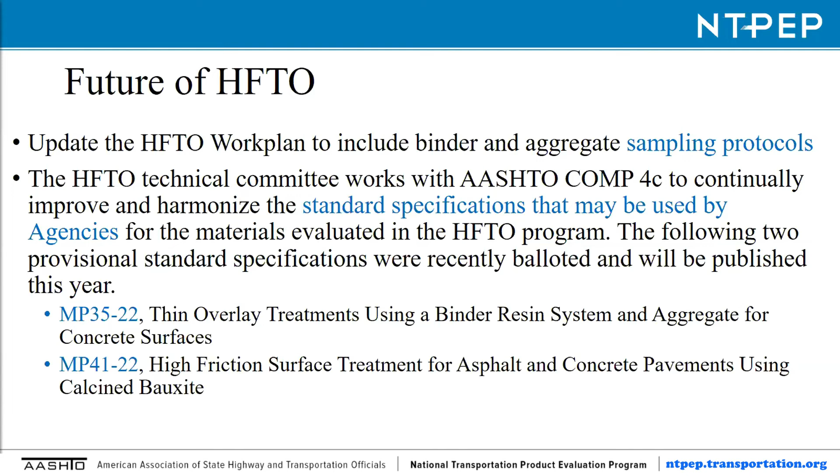With that, I'm going to open it back up. Danny and I can take some questions. I don't know if there were any questions dropped in the chat, or if anybody has anything they'd like to ask Danny or myself. Kelly and Danny, Montana DOT had a question, and Oak asks if you can speak to the aggregate moisture at all. They are spinning their wheels on how to specify, test, and accept the aggregates, specifically moisture content. Does the evaluation program do any aggregate moisture testing?

I believe in that report we do not do the moisture content, but there is a moisture content requirement, Oak. Danny, can you hear me? Yes. I saw in the report there it talked about T255. So it looked like you were doing the testing, but in the current data mine I didn't see that. Well, it's been a while since I looked. So, but it sounds like you're going to address it moving forward. So that was my question.

Is the evaluation going to look at the aggregate and do a moisture evaluation? Because if that's the case moving forward, or if that's how the work plan is going to be updated, then I think that will help us out. I just went over that, and 255 is in there. I was trying to quote what we say.